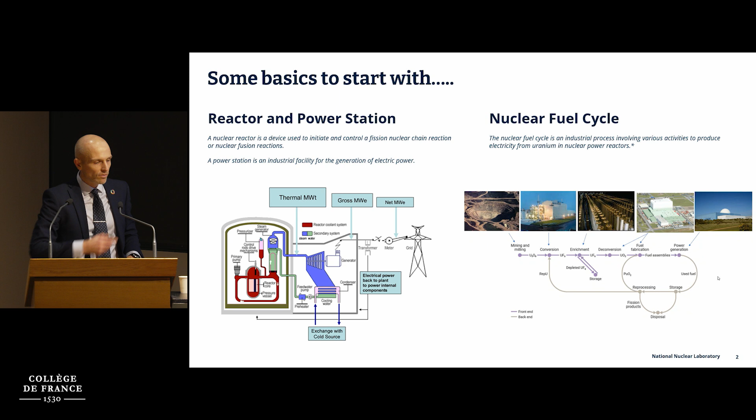Jean-Marie mentioned COP28, and it's a really significant moment of being part of the nuclear sector. Anyone that has attended a COP or been part of the process will note that nuclear has been conspicuous by its absence. And for the first time, nuclear was written in at the end of this COP28, specifically in the wording of the technologies we need to accelerate in order to mitigate the effects of climate change. And I think it's an important part.

There's still questions, and I know questions within the EU around the taxonomy, and is nuclear green? Is it low carbon? There's still many people across the world that won't recognise nuclear as a low carbon energy. So this is a significant moment, as we go forward across the world, as we've got incredible challenges to decarbonise the energy system. If we rule out a technology, it will be even harder to do that.

In the UK, Brexit was not great. On the upside, we're writing our own taxonomy rather than the EU taxonomy, taking a lot of the EU taxonomy, but one of the key things was, and this is out for consultation, nuclear will be a sustainable technology. This is really important because accessing finance is important, and how we finance particularly large projects is important.

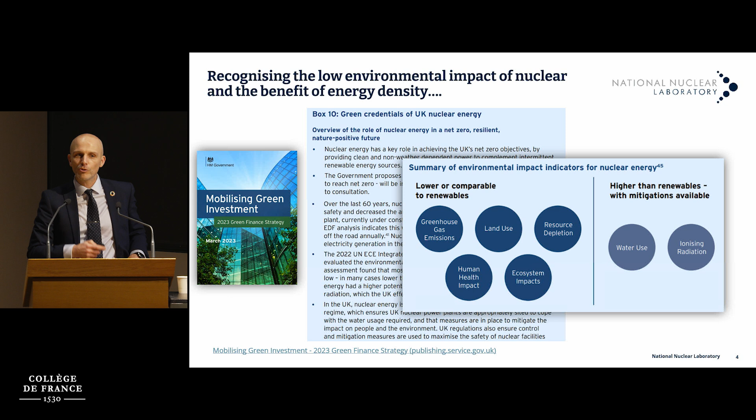The beauty of nuclear is the energy density. It's a beautiful thing, and land use means we can generate large amounts of energy from very small amounts of land. A large reactor is about the size of this room and will power millions of homes, it's incredibly efficient. A uranium fuel pellet, the size of your thumbnail, is the same energy as a ton of coal. Harnessing that in the right way surely has to be good for humanity as we go forward.

Jean-Marie mentioned the commitment from 20 countries to triple the amount of nuclear energy. That will only take us to the level we currently are, about 10% of global electricity generated from nuclear energy. So that will maintain around 10% of global electricity, and the UK and France were both part of that commitment, which is really good. It needs detail behind it - it's high-level statements at the moment, so it needs real detail to underpin that.

Remember, this is largely looking at electricity, and we will electrify to decarbonise, but there are parts of society that we won't electrify, and I'll mention that. So the opportunities for nuclear are beyond electrification.

So where are we today? Just so everyone's up to speed in terms of the global situation - about 10% of electricity production, 400 gigawatts across the world. The second bullet is interesting, particularly from the UK and France, currently embarking on new build programs, but generally in the West and Central Europe there's been a decline in nuclear with an increase in China and wider Asia.

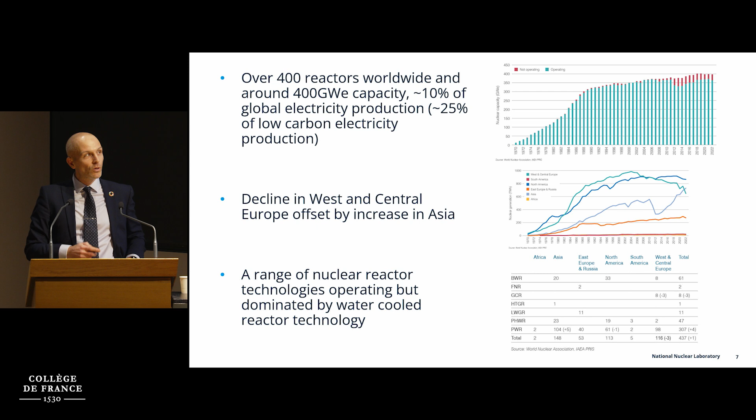We talk about technology a lot, and the majority of nuclear reactors worldwide are light water, water-cooled, taking the energy away. But we have other technologies - in the UK, the GCR, gas-cooled reactors. So there are other technologies around. And whoever will listen, I will say that deploying nuclear is not a technology challenge. It's really not a technology challenge. There are technology opportunities and innovation, but deploying nuclear is not a technology challenge at the moment.

Really interesting point about innovation - it doesn't necessarily mean new technology. There are huge amounts of innovation in getting the most out of our current operating reactor systems. We now have about 80% capacity factor worldwide, operating 80% of the time, which is really important. That's gone up, and huge amounts of research have gone into materials, fuels, operation, chemistry, in order to allow us to do that. One of the reasons we need to keep deploying light water reactors is because of all of this to go forward.

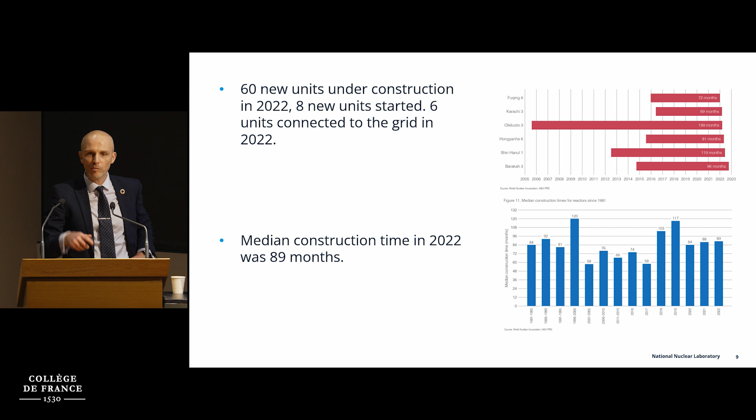The other thing is construction, and people will say nuclear is slow. Yes, and the quote is, when was the best time to build nuclear? A decade or so ago, but the second best is now, because we're going to need that energy to decarbonise by 2050, but we're going to need energy beyond 2050. The other thing to take from this chart is that nuclear is being built on time and to cost around the world currently. So you will hear negative stories, but you will also hear, particularly in China and the UAE, about deploying nuclear to time and cost.

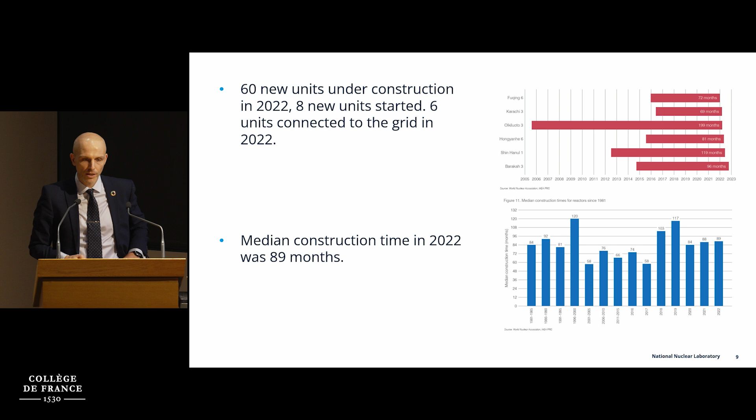So around 6 gigawatt current capacity in the UK, with actual generation around 2.5 gigawatt, which was due to reactor refueling and currently a couple of reactors off with steam valve issues.

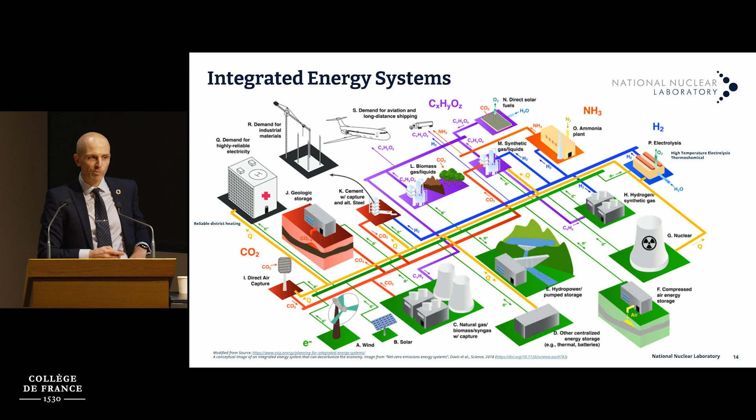But to do that, nuclear has to be part of the full system assessments as we go forward. I raised some challenges we had in a UK context, that the role of nuclear was only for electricity, and only for large reactors, not new reactors. Policy was being generated that way, mainly because the full system energy models weren't putting nuclear in as an option, so clearly it wasn't coming out in the solutions. One thing to be cautious of is understanding the assumptions going into full system models - if the model isn't offered that input, you're not going to get that output.

So we undertook, with the Energy Systems Catapult in the UK, a full energy system model. The Energy System Catapult takes information from all technologies, from renewables, carbon capture and others, and pulls the latest information together into a full system model, not just electricity. We modeled to net zero in 2050. But what we did this time, for the first time in the UK, and to some extent globally, was provide the option to have generation 4 or advanced systems providing hydrogen, direct heat to industry and district heat, and the production of synthetic fuels.

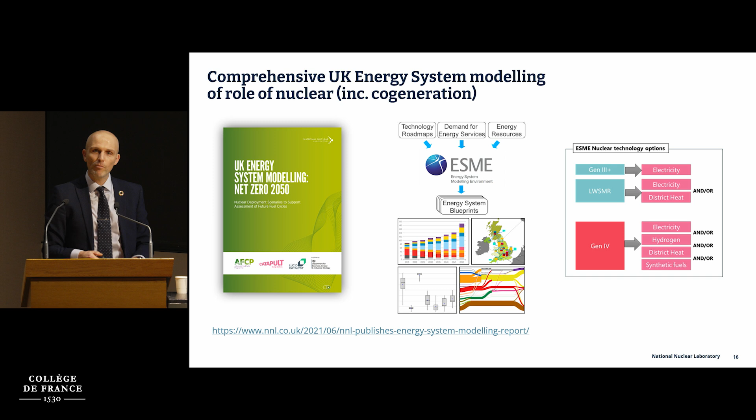Not going into the detail of the results, but the complexity of decarbonising the energy system is just huge. Getting to a decarbonised energy system in the UK needs every single tool. So having nuclear, having more options, gives you that flexibility and makes it easier.

You can achieve net zero without nuclear in the UK, but it is incredibly complex. It is reliant upon speculative technologies that are yet to be matured, and it is more expensive because of the complexity of the system. But I can't stand here and say you can't provide a solution without nuclear.

You can. However, increasing amounts of nuclear with the flexibility to provide heat as well, reduces the cost of the overall system, and it produces a lower system cost overall.

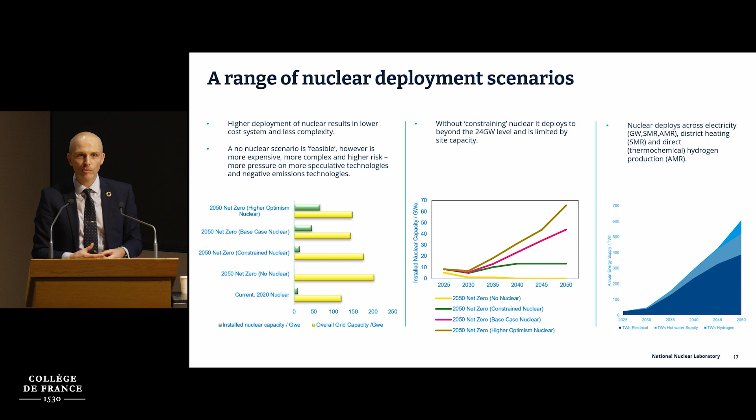And I believe if we get the policy environment right and plan our energy system right, nuclear will play a role beyond the 24 gigawatt. But there's a lot that has to fall into place.

And the chart on the right just says majority electricity, but it does contribute, along with other technologies, to production of hydrogen and district heat.

So just very quickly on the role beyond electricity and what the UK is doing. So talked about advanced systems. Generally in the UK, we describe advanced systems as non-light water cooled systems.

And the UK has run a program called its Advanced Modular Reactor Demonstration Program. This is to demonstrate by the early 2030s the ability to provide heat from an advanced reactor system to industry. And one of the good things the government did was narrow down the technologies.

So it asked for one specific technology, and I'll talk about why they did that. But the complexity of what's coming forward in the UK and internationally from a reactor perspective does get complicated for policymakers, and they wanted to focus down on a technology.

They chose high temperature gas reactor, and they did it by a kind of multi-criteria analysis, with the important things being the bits highlighted in red.

What can deploy soonest, and what has the temperatures that the industries they were targeting might need in terms of output temperatures. So high temperature gas reactors can go above 700 degrees C, whereas current light water reactor is about 300 degrees C.

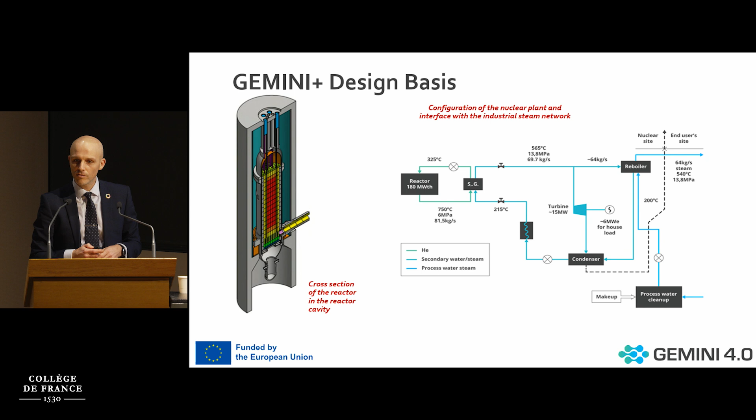But yeah, a relief to be back in Horizon. Unfortunately, the complication of not being in Euratom is somewhat frustrating, but we are still engaging with colleagues in France to drive forward the collaboration. Where will these high temperature reactors be located and why, and what's the opportunity?

So if we can put back in an energy source that is low carbon, can provide electricity and heat, can we support the decarbonising? Can we maintain the economic impact and benefit in those regions of the northeast?

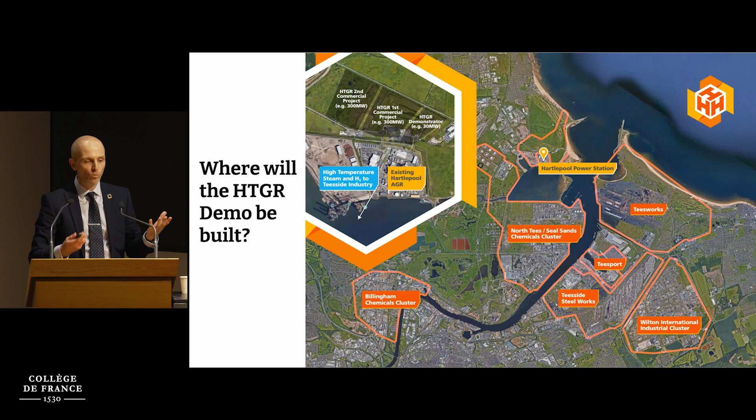And regionally, in terms of social acceptance, we find locations that have existing reactors really want new nuclear in their regions. So a couple of last slides.

I think the role for nuclear in the energy park concept needs to be considered, but these roles can only come to pass. Let's look at it from the basics. Nuclear will provide you with heat, that's what it will do. How do you harness that low carbon heat? If we get it right, it should help us in all of these areas.

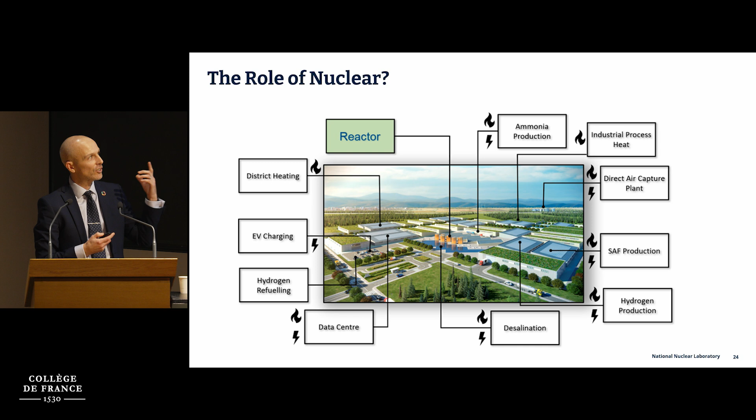But the important bit to leave, I have 3 questions, and I will quote Professor Sir David Mackay, former Chief Scientific Advisor to UK Government, who wrote a wonderful book, Sustainable Energy Without the Hot Air. He said, whatever happens, you need a plan that adds up. And I couldn't agree more.

So we need to understand what the system looks like. The first bit, what's the role within that system? The second bit, and Yves will talk a bit about this, is do we have the resources? Do we understand the fuel cycle? How are we going to fuel it? And then what's your plan to deliver those technologies?

We did this as part of what we call the Advanced Fuel Cycle Programme in the UK, to start to look and provide that information into government. But it is those 3 steps that are really important.

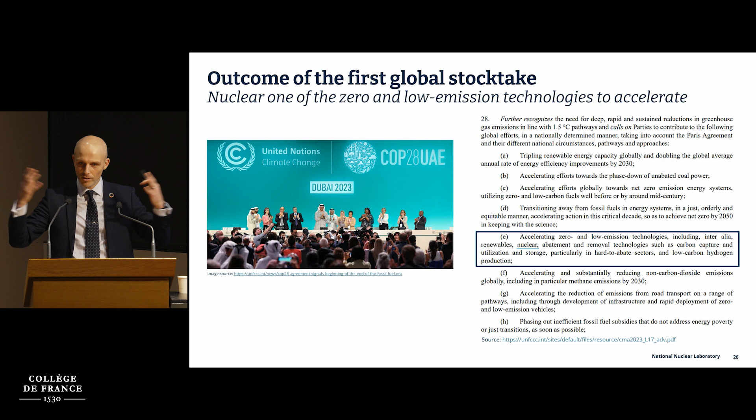I'll finish where we started, because I think it's really important now, if there is consensus that we need to accelerate the deployment of low carbon and low emission technologies, including nuclear, then we need to get together to work out how we do that. So I'll stop there, and I'll hand over to Yves to talk a bit more about the concepts going forward. But thank you again for the opportunity to talk.

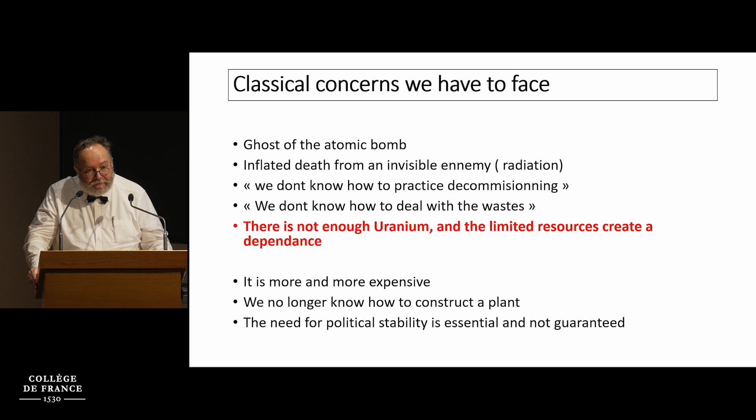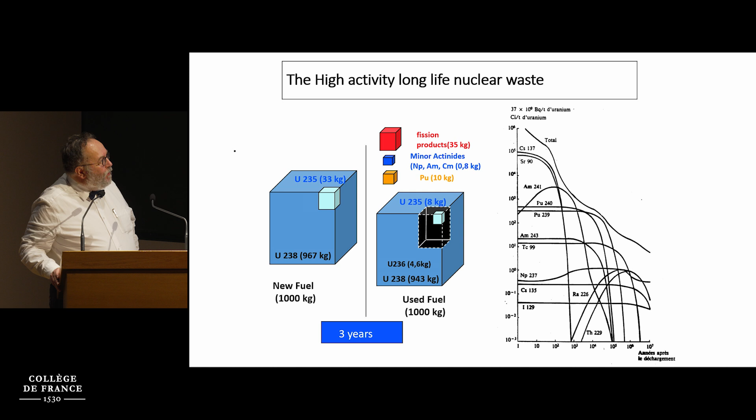Now, if I look at the waste, if you look at the high activity, long life nuclear waste, these various cubes give you the original fuel. In the original fuel, after 3 years, you have fission products, minor actinides and plutonium. The fission products are relatively short term, minor actinides are long term, plutonium is long term. But the number of kilograms which are there are pretty small. And if you look at the way you store them, after 100,000 years, you know it's long. That means it's a time scale which is not the time scale of an engineer, that's a time scale of geology. After 100,000 years, the amount of radioactivity which goes up out of the ground is something which is exactly at the level of the radioactivity of the ground.

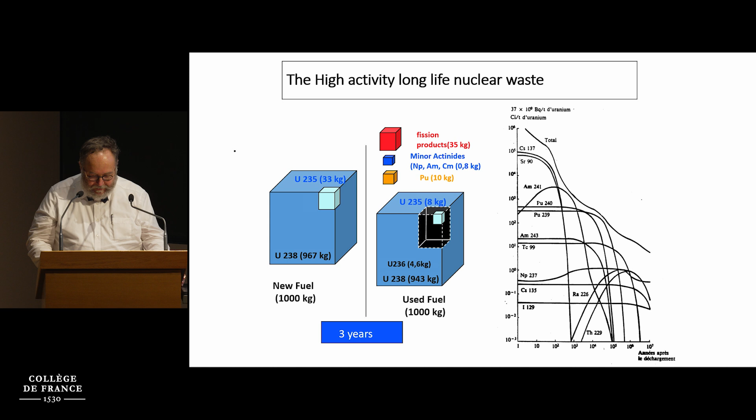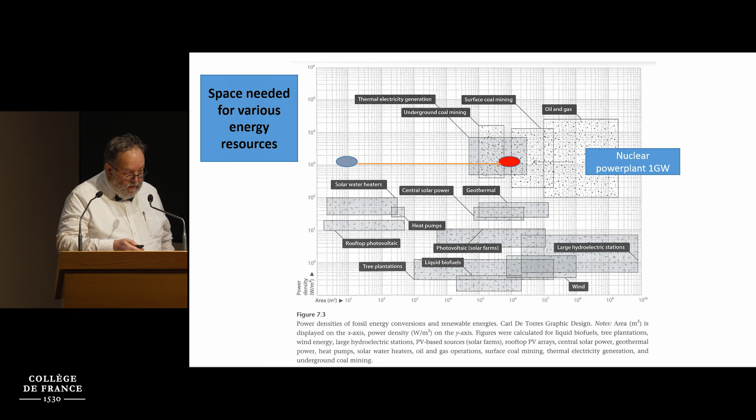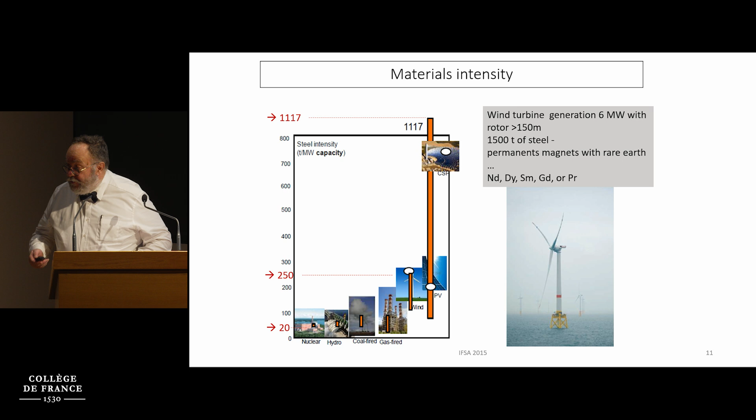Now, the density of matter which is used is also very important. You need a low quantity of matter to operate a nuclear power plant. By matter, I don't mean the fuel, I mean everything which goes around - the concrete, the steel, and so on. And again, that's because of the density of energy produced, that you don't need big things to make a big quantity of energy. You have big things in a nuclear reactor, but they give you an enormous power compared to a similar structure. If you look simply at tons of steel normalized by the megawatt produced, I think you have a factor of 20. You go from 20 to something like 1117 if you're going from nuclear to a solar plant. So that's again something important - it's not using a lot of matter. And the matter it's using for fuel is basically useless - you cannot do anything with uranium except producing energy.

Now, what is nuclear energy? I'm not going to give you a course in nuclear physics, but basically it's a whole question of neutron economy. The neutron economy, which tells you how many atoms are going to be fissioned during a chain reaction, depends on the fuel, the geometry of the assemblies, and the moderator to slow down the neutrons - I'll come back to that - and the absorption of excess neutrons. The evolution of the element will mean how many fission products we have, how many actinides, how much plutonium I have created, and you have the question of extracting the heat, either to use it as heat or to run a turbine to produce electricity.

So my summary of what is nuclear energy is basically a neutron grocery shop, which is coupled with a steam engine. And that's the reason it developed so rapidly, because we were relying on 150 years of steam engines. Now, the grocery shop is related to the fuel, and it's connected to the waste. From this very simple picture, you question how can I secure the resource, how can I limit the waste - that will be the thing which makes nuclear energy sustainable. In terms of electricity and heat generation, you are back to the 19th century. But that's a technology which is available.

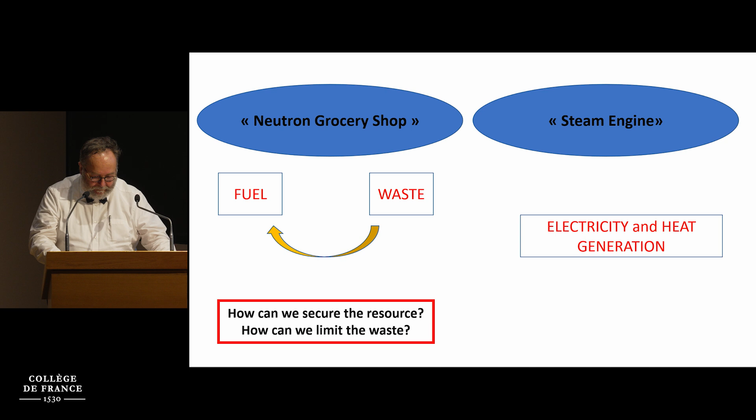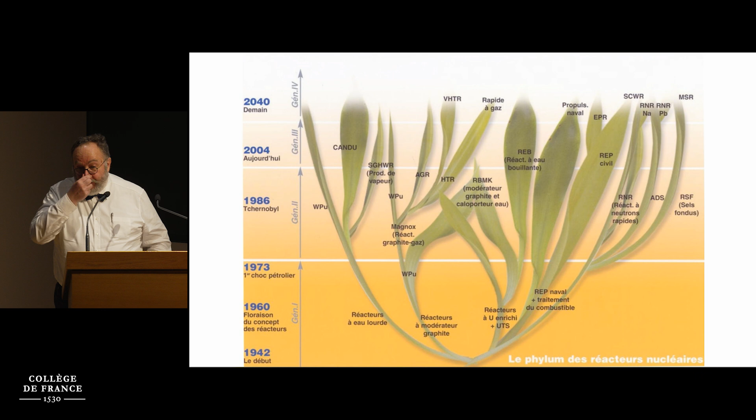Now, as Paul said, there are many nuclear reactors. I like this diagram, which is a sort of phylogenetic tree of all the possible reactors. But in fact, there is one which is largely dominant on Earth in the current situation, which is the pressurized water reactor. I'm just going to talk in the rest of the presentation about the PWR, because the question we have is to build them, but also to manage the way they are aging.

And I'm going to talk about the fast neutron reactors, because that's the one which is imposed if you want to have a sustainable nuclear energy.

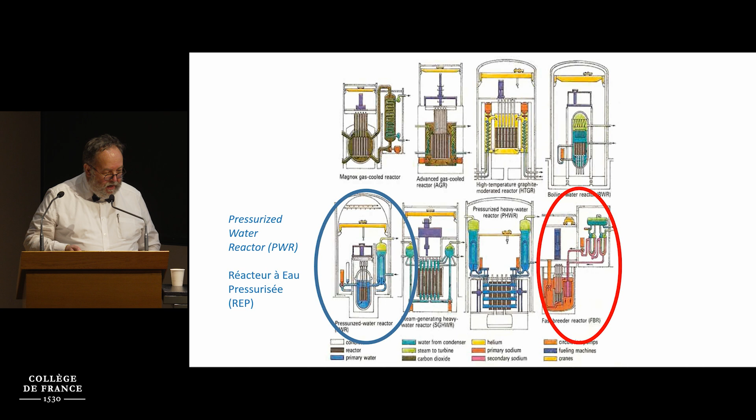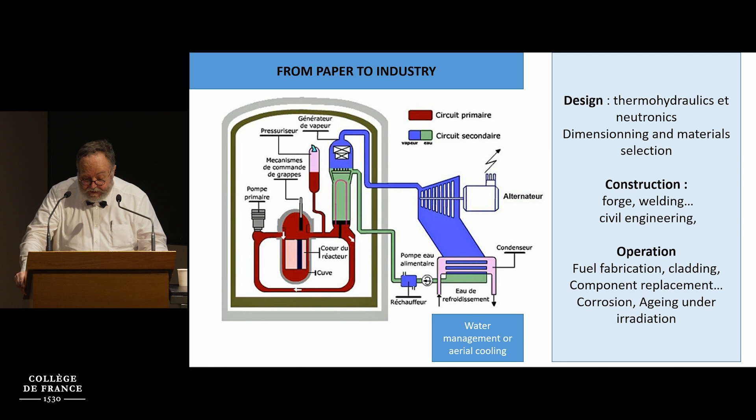But all these things are under control because the nuclear reactors are permanently controlled. You have a regular visit of the nuclear reactor, and when you notice there is something wrong, you stop it and change it.

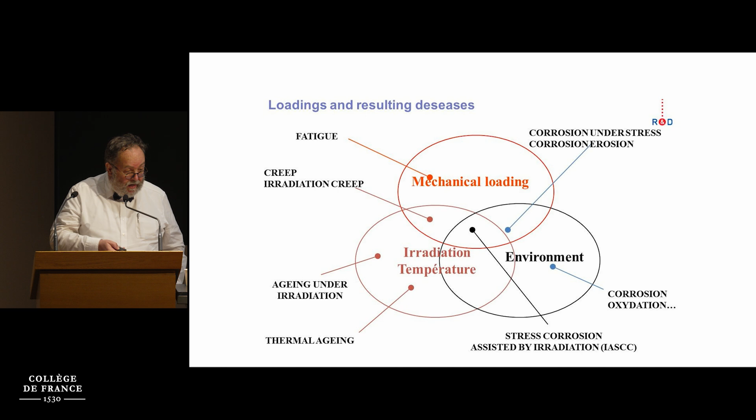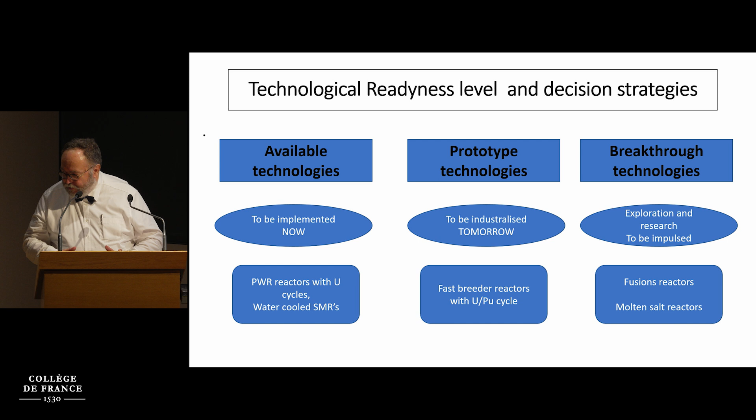Now, I come back to my last point, which is towards sustainable nuclear energy, and you'll see why I mean sustainable. So the classical fuel cycle, which is the one operating in France, is basically: you take uranium, that means you have to mine it, you make your fuel, you put your fuel inside the reactor, it lasts 3 years, and you go back, and then it could become waste, or when we stupidly decided in 1998 to stop Superphénix, there was a sort of surrogate which appeared, the MOX, which is basically you make a second term, but it's becoming a real nightmare, so you just stop there and then go to storage.

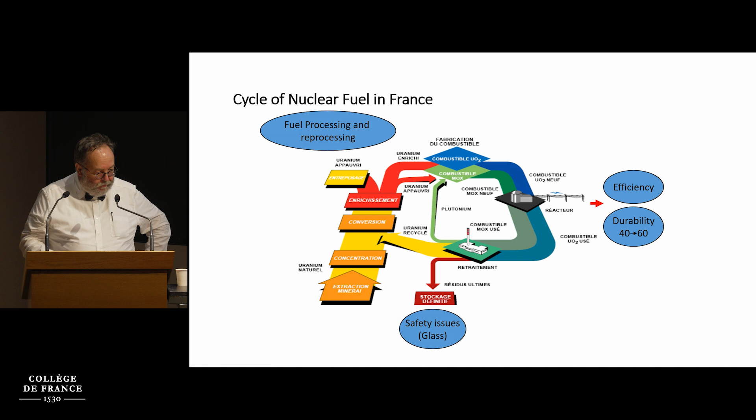Now, if we look at the classical cycle, that's where the SMRs and AMRs are appearing. And I just want to put some words here: beyond the 'small is beautiful.' I mean, it's interesting not simply because it is small. Being small means that you have a lower initial capex, and therefore a higher cost for a similar power. That's something you have to live with. Then you have to ask, am I ready to afford that?

I think the key issue, which we very seldom ask and which the UK has been asking, is when is it relevant? In France we keep talking about small reactors without asking what for. The reason they are relevant: it can be on industrial sites which need heat or electricity far from the grid. It can be relevant on islands. It can be relevant for heating cities, provided you have the network for heat transportation. It can be relevant for desalination. Before jumping into something which is small, therefore beautiful, we should argue why we want to go there.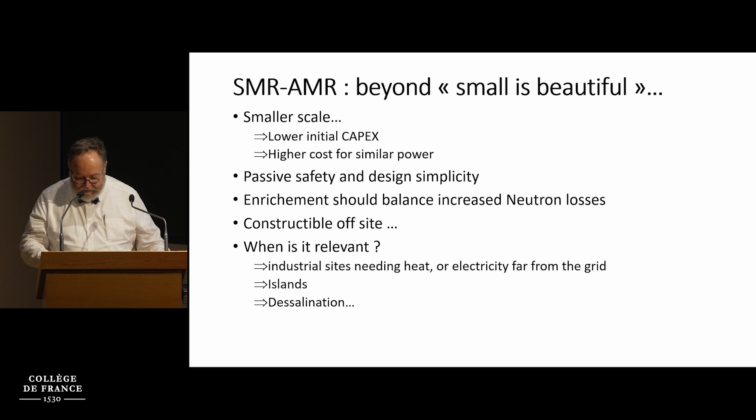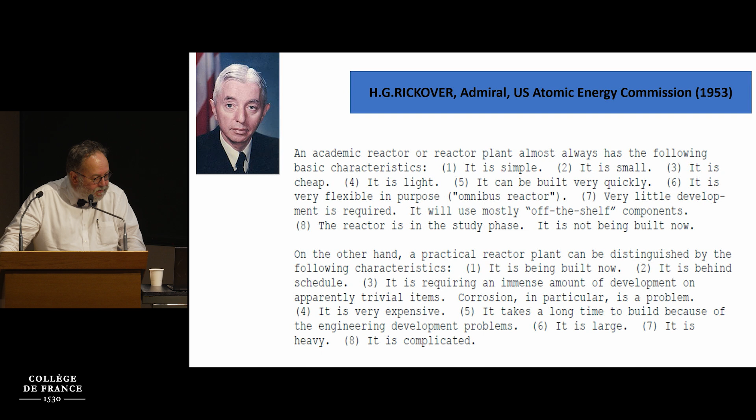Now I just want to quote you this wonderful statement by Rickover about the difference between the academic reactor and the real reactor. The academic reactor is always working very nicely on paper, never has any problem, is supposed to be cheap, rapidly constructed, and so on. The real reactor, it's being built now. It is behind schedule. It requires an immense amount of development on apparently trivial items - corrosion, for instance. It is very expensive. It takes a long time to build because of engineering development problems. It is large, heavy, and complicated.

Now, need for a better use of uranium resources, why? Well, look where it comes from. Currently the main providers of uranium are Kazakhstan, Niger, Canada, and Australia. I let you guess which ones I feel more happy with and which ones I would like to avoid.

Now, the second point is that we have been hearing that we have to multiply nuclear energy by 3. Interestingly, the guy who said that is also the one who stopped nuclear fast breeders in France. If nuclear energy increases within the world by 2% per year, the uranium resources from standard mining will be almost consumed by 2050. That doesn't mean you couldn't find more, but it means they will be much more expensive.

Nobody can claim for sure that nuclear energy is a transient solution. Under many political decisions, there is this unsaid belief that we have to live with nuclear energy, but it's only a transient. There is no proof of that, and I wouldn't like my country, or any country, to take the risk of jumping out of a plane hoping the parachute will be ready when I reach the ground.

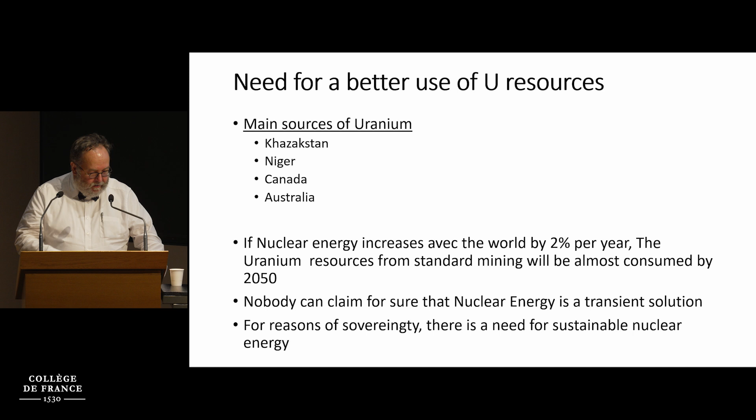For reasons of sovereignty, there is a need for sustainable nuclear energy, for the very reason I told you. Now, sustainable nuclear energy is another cycle - it's multi-recycling in a fast breeder scheme. That means the uranium that goes into your cycle is going to produce plutonium. You have some uranium which is not usable, and the plutonium you just put back with the impoverished uranium, and you do it again and again and again.

That means that basically with all the 300,000 tons of impoverished uranium we have in France, you have something like 2,000 years of resources without needing mining. Not surprisingly, the people doing mining are not so happy with this idea. Not surprisingly, the people who don't like nuclear energy are not happy with that either. That's exactly why this, which is the cornerstone of a sustainable nuclear energy, was the target of anybody who wanted to get rid of nuclear energy.

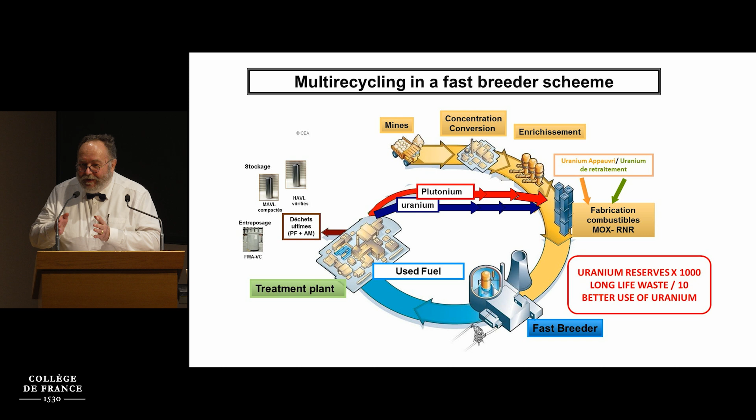Now, where does it come from? It's not new - it comes back to the wisdom of Fermi. The wisdom of Fermi, and these are the only two slides of nuclear physics I will give you, is that if you look at fissile elements, they can undergo nuclear fission by neutron bombardment of any energy.

And the one which is able to do that is mainly uranium-235, which is 0.7% of the natural uranium. That's why it tells you that the use of uranium we are making in standard PWR is poor. Only 0.7% of natural uranium is used.

Then you have the fertile elements, which can become fissile by capturing a neutron. That's the case of the plutonium, created by U-238, and U-233, created by thorium.

The neutrons created by fission are fast, and they can't break efficiently the U-235. In order to be efficient, they have to be slowed down. And the slowing down agent in the PWR is water. The water is both slowing down the neutrons and extracting the heat.

If you look at these thermal neutrons, which have been slowed down, they have also another aspect which is less pleasant: the absorption increases, which means that you are creating long-life waste, the actinides, and you are creating plutonium. Now the fissile plutonium can be separated, reincorporated into a fuel, and that's the MOX strategy.

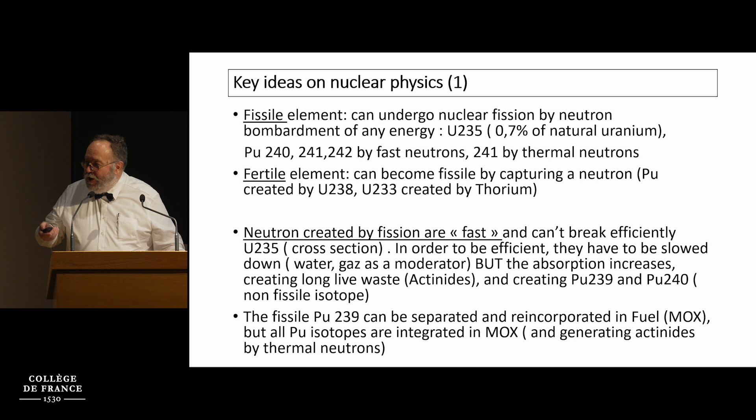Now, the problem is that the MOX, if it's going through slow thermal neutrons, is going to be more and more polluted by actinides. So that's something which is difficult to deal with after one cycle.

Now, the key idea is that if neutrons are not slowed down, they are fast neutrons, the Pu-239 is not degraded, and the uranium-238 generates plutonium. The fuel made of plutonium and uranium-238, which is useless with standard neutrons, can be used in a fast breeder mode.

It can either create more plutonium, or in isogenerator mode, have the same amount of plutonium produced. The main goal of the fast neutron reactor is to burn the uranium-238, which is the impoverished uranium—the one which is useless, and the one which is the most frequent one.

Now, but it doesn't create actinides. In order to keep the neutron fast, they have to bounce back on heavy atoms, and water is excluded. That's why you are using molten lead or molten sodium in order to do that.

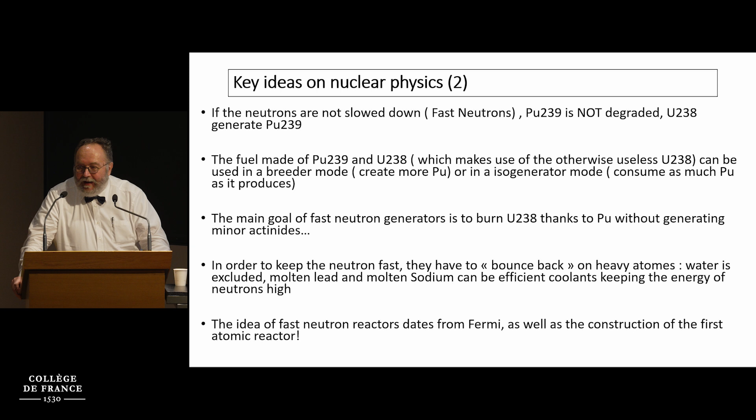Now, the idea of fast neutron reactors dates from Fermi, as well as the first construction of the atomic reactor.

Just to make a simple picture: if you take a match, the plutonium is the phosphorus at the end of the match, and the uranium-238 is the wood of the match. So you just light the match, you eat the uranium-238. The interesting thing is that it's a permanent match, because you recreate plutonium. So it's just a match that you could light up again and again and again in order to burn the wood that you have in huge quantity compared to the plutonium that you have in small quantities.

Now, if I look at the various options, comparing just the last line between the standard PWR and the fast breeders: instead of creating transuraniums by something like 30 kilograms and 27 kilograms of plutonium, you take only 4 kilograms of transuranium, 0 kilogram of plutonium unused. So the plutonium is used as a resource.

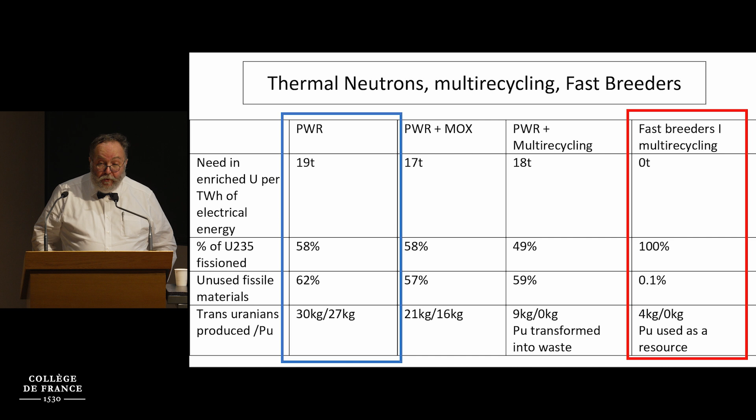If you look at the percentage of uranium fissile material which has been used, only 62% is unused in the PWR, while 0.1% is unused in the fast breeders. That comes to my concluding remarks.

The assets of nuclear energy for decarbonizing the economy: I think it's fair to say it's a mature industrial field with potential for innovation. It makes an efficient use of resource, space, and matter. It's amenable to an easy integration into existing networks. It goes to a dense electricity production or for a dense electricity usage.

It's responsible. This industry has developed a responsible management of the whole life cycle, in spite of what is said. If you look at the SMR, AMR, there is a need to analyze the technical issues and the economical relevance, but provided you do that, there are possible developments.

The strategy for a better use of fuel: fast breeders for sustainable nuclear energy. That needs, in any case, a long-term commitment in a politically stable environment. All the words have been weighted. And it needs collaboration between countries—one of the reasons for which I'm so happy to see UK and France talking together again on these topics.